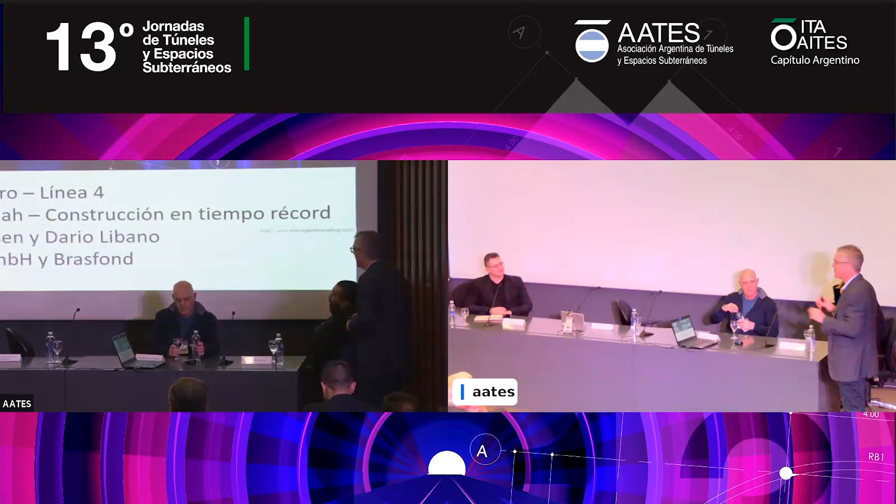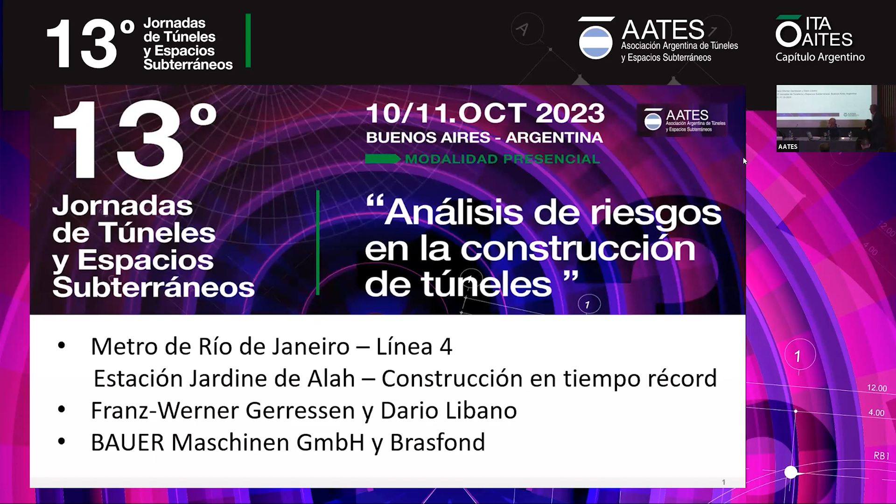Once more, welcome to a topic which is not 100% about tunneling, but you have a TBM and maybe you have to pass through what we show here, because it's now about the construction of a metro station. This has been done in a rapid tempo for the Olympics: the Metro de Rio de Janeiro, Line 4, about the station Jardim de Alah.

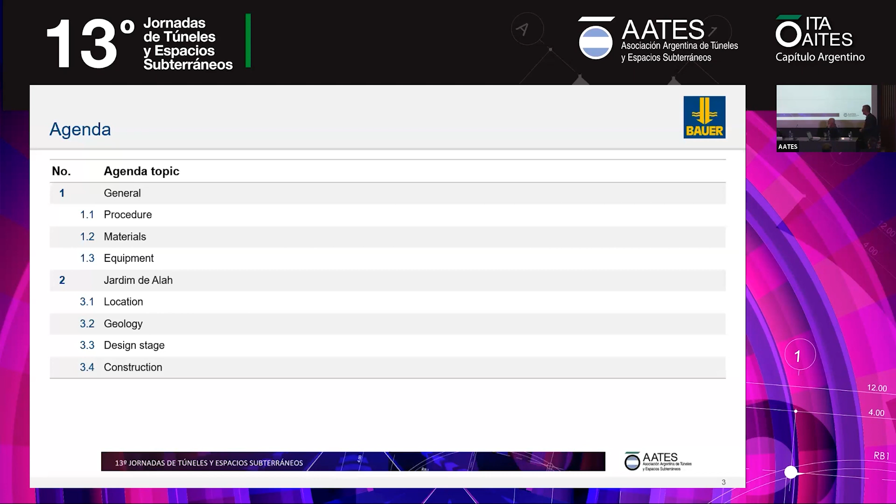For those which are not familiar with the main technique, I will give you a brief introduction to the procedure, and then of course we will move to the installation and the job site. So a little bit in general about the procedure: we are talking about diaphragm wall installation using a trench cutter system.

When we look at the system, how does it work? First of all, we need to do a small pre-excavation inside a guide wall before we can launch the trench cutter to install and excavate the trenches. Usually the excavation takes place in a single or multiple bite as shown here.

As soon as we have finished the excavation, we insert the reinforcement cage and start the concreting process. Usually you do a number of primary panels as shown here, and then come back later and install secondary panels. The secondary panels cut into the primary panels, and due to the shape of the cutter wheels, you get an interlocking system which ensures good contact and a watertight joint. So with all the secondaries, you close the gaps between the primaries and create the continuous wall.

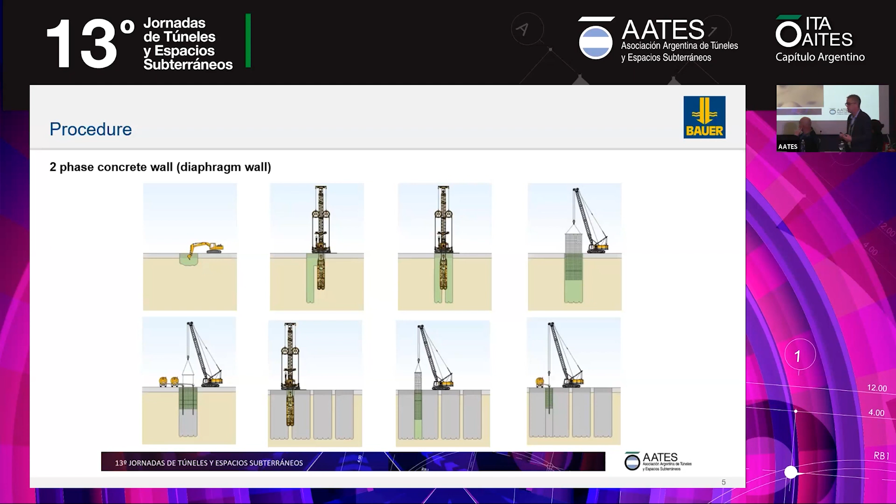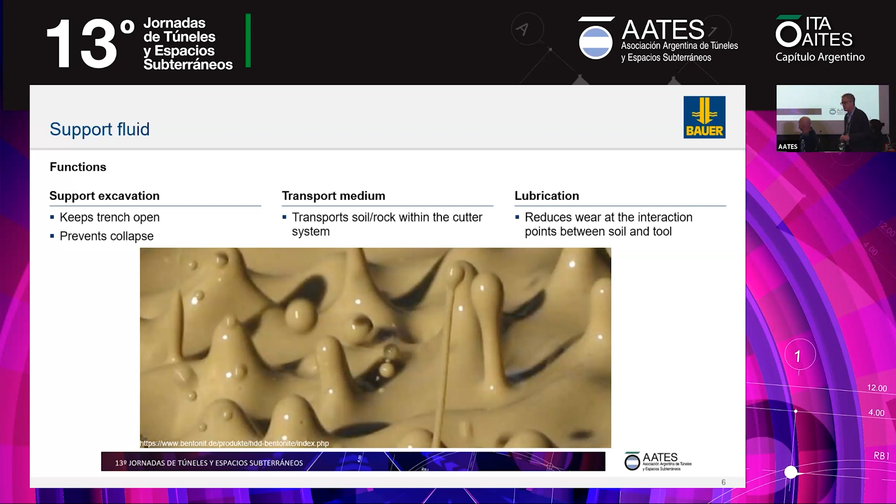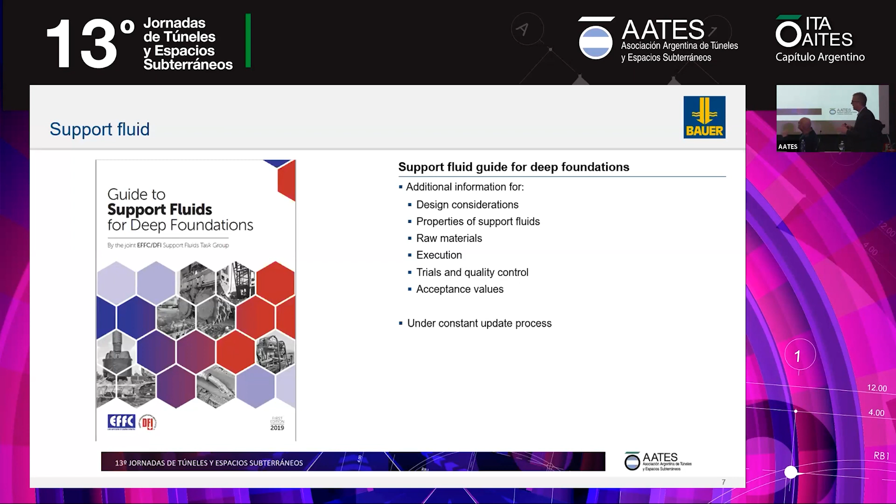Typically, bentonite or polymer slurries are used, and I want to mention there is a guide for support fluids for deep foundations, a joint effort between the American Deep Foundation Institute and the European Federation of Foundation Contractors. They put all the knowledge and disciplines of their working group together to make the industry better. It's freely available on the DFI or EFFC webpage, and it can guide you through all the information you require for the design, properties, execution, quality control, and whatever is required for using a support fluid.

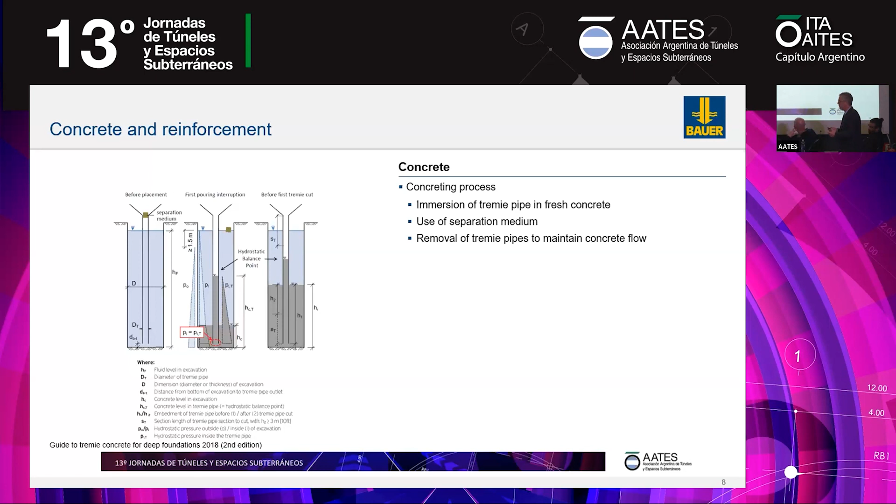In the second part, after we finish the execution, we have to reinforce and concrete. For the concrete, it's important to have a proper tremie pipe to ensure a proper concreting process, and of course concreting is quite an important issue. Especially when you go for deeper concreting sessions, the concrete properties for workability, stability, and self-compacting are quite important to avoid any problems.

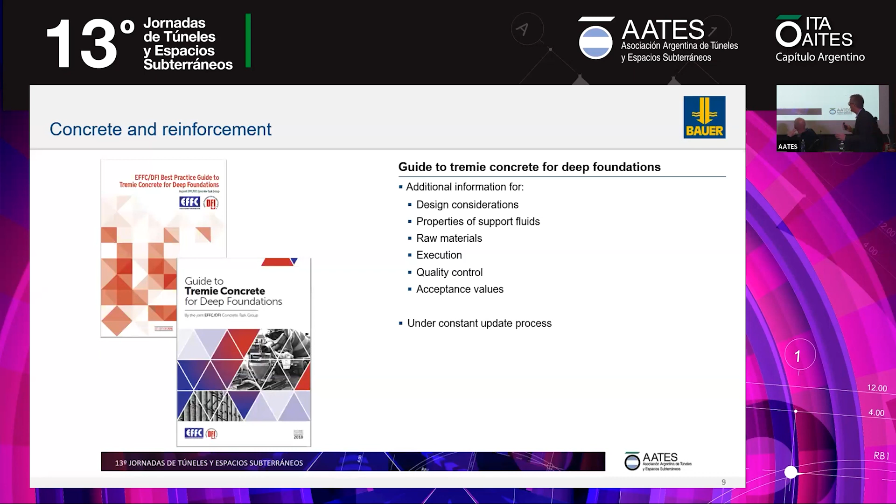There is also a guide available for this. They are already in the second edition, so they have gained more experience. Again, I recommend whoever is interested in these topics to download it from the homepage, and it's set for free.

To execute the work, we need some equipment, and here we see various types of so-called hose handling systems, either on a crane-based system or on a mast-based system. Depending on the slurry hose system, you can achieve higher depths. The biggest depths you can gain with a hose drum system, which you can mount either on a base carrier as a drilling rig or on a crane.

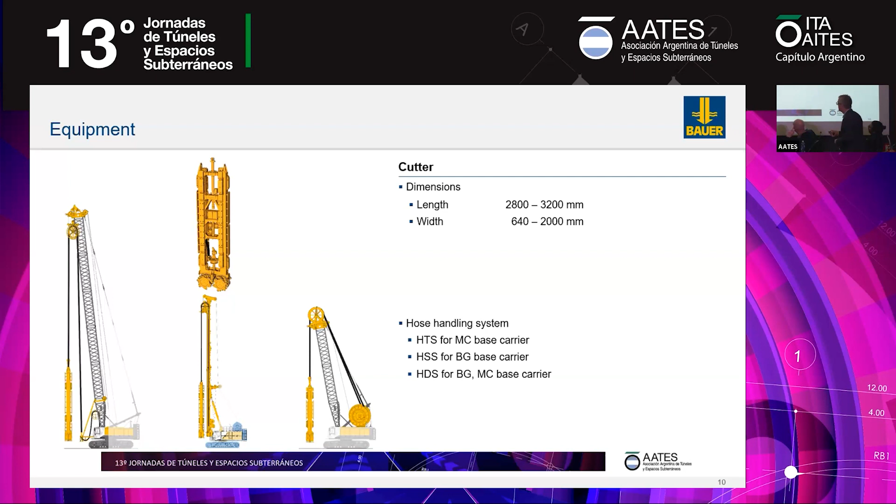With a hose drum system, we are actually able to reach depths of up to 250 meters. Of course, the key component is the cutter itself. When we look at the cutter a little more, we have some steering plates to guide the cutter in case any deviations occur. We have a mud hose inside, and as said, we cut the soil with the cutter wheels.

They are hidden here for special reasons, at the bottom. When we loosen the material with the cutter wheels, there is a suction box on top. The suction box acts like a Hoover cleaner and removes the loosened soil together with the slurry via the mud pump and the mud hose.

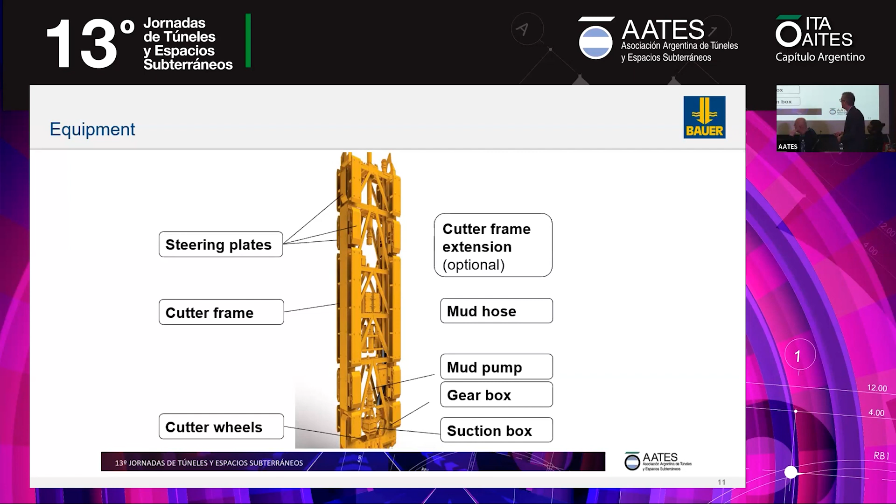Of course, we need to know how the cutter wheels look like, and there are various types of cutter wheels existing. We have standard wheels for any kind of soil conditions, and we have various types of wheels for rock and very hard rock conditions. So whatever you expect in your ground conditions, you can adjust your wheel types.

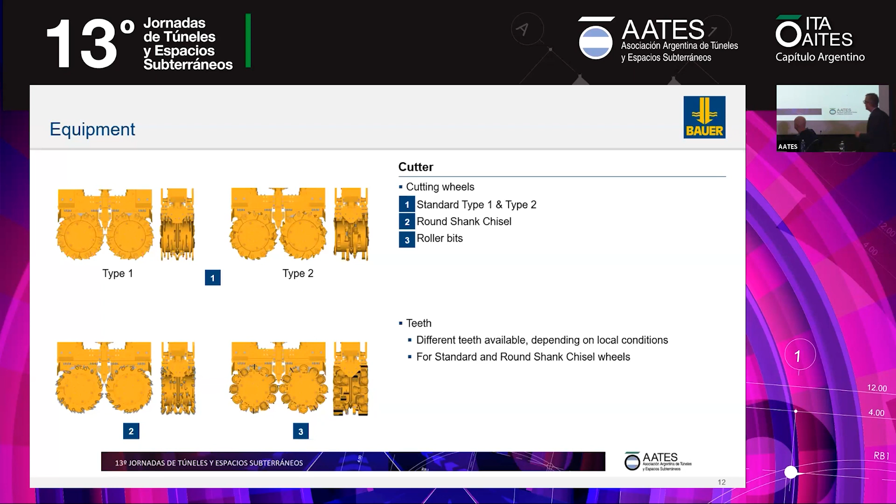Unfortunately, we cannot change the wheels like Formula One. It takes a little bit longer, but it's reasonable time. Altogether, it is somehow in a circle.

As said, when we loosen the material with the cutter, we transport the material on the downstroke through the slurry pipe, through the hose, and we pump it to a desanding unit. At that area, the slurry and the material, the soil, will be separated so that you can spoil the material, the soil, and the slurry will go back into the circuit and will be pumped back into the trench, because you won't have an empty trench. You have to have it filled and stable. And so this is a closed circuit.

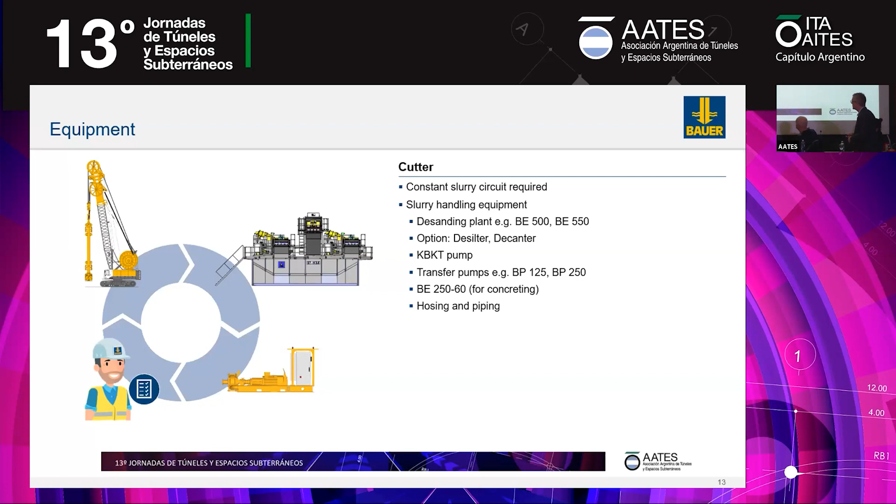And the desanding unit, you can adjust according to your soil conditions. You can add a desilter, you can add a decanter. So whatever is required to have a proper slurry for the installation, you can set it up. So now we know how to do the work.

We can take a look at the subway station.

Line number 4 was at that time the newest addition to the network in Rio de Janeiro. It starts in the south at the nice areas of Ipanema and the beaches, going west to Barra da Tijuca, where the Olympic Park and the Olympic Village was built for the Olympic Games. So everything had to be done until the Olympics 2016.

It covers in total six new stations. This one was already existing. And the whole thing is about 16 kilometers in total length. The expected cost was about $2.2 billion US. You may ask later what was the real cost. Unfortunately, I cannot answer this question if you think about it.

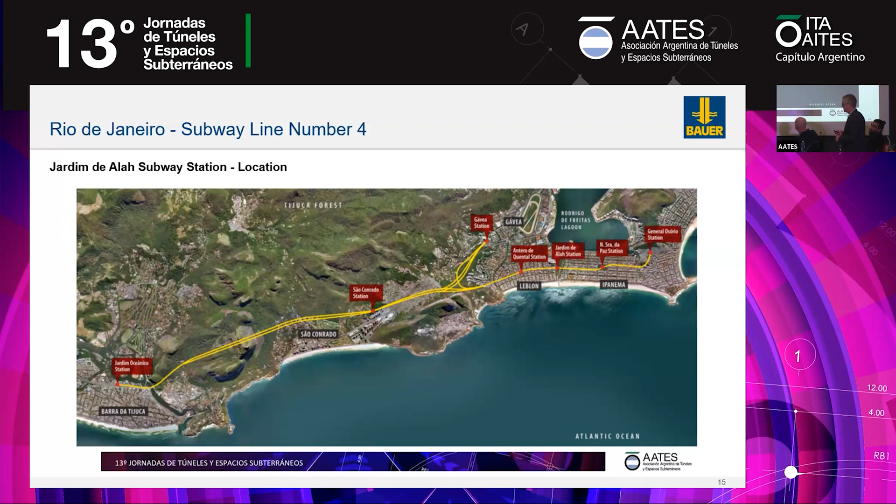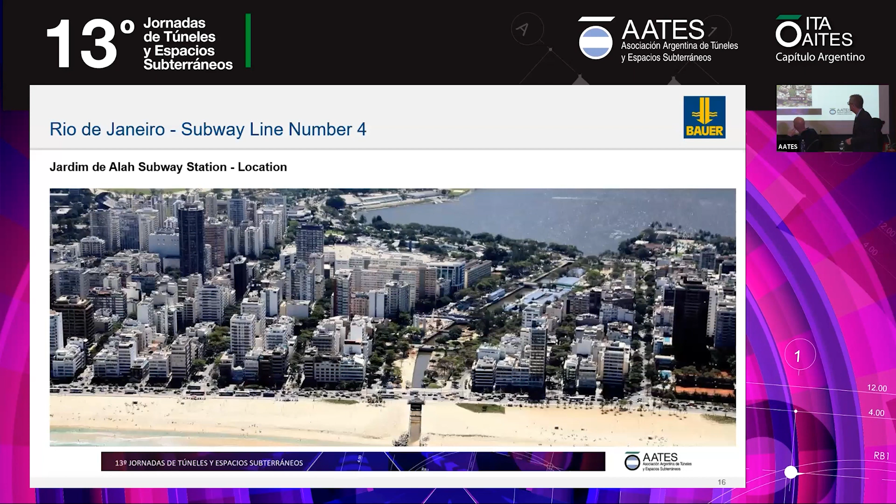We focus on the most critical and most complicated station, the Jardim de Alah. It's located in an area between the ocean at Ipanema and the lake. You can already imagine here, you can see already some silos. And we look a little bit closer, it's really in the center of a street, adjacent to high-rise buildings.

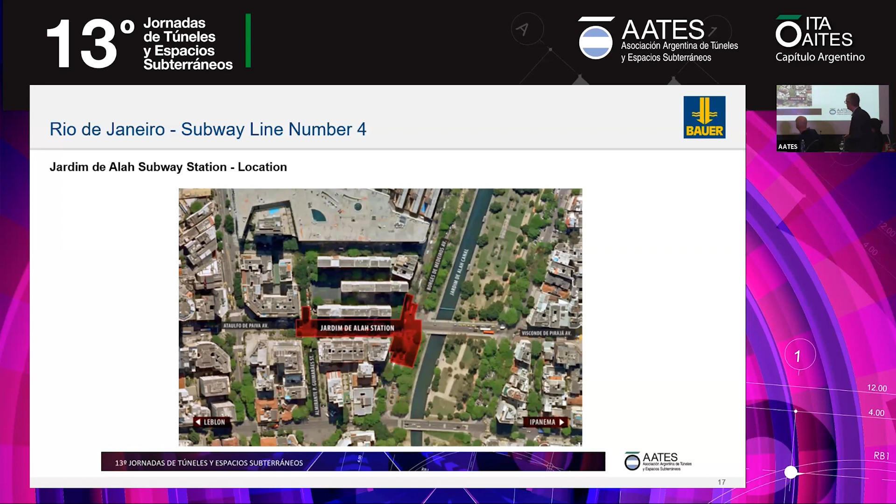The high-rise buildings are just founded on shallow foundations in a saturated sand, and the groundwater table, you can imagine, is quite high, so it's just 3 meters below the ground because it's sea level. The soil conditions are mainly sand, loose to medium sand, also sometimes compacted, and then we reached rock, a gneiss rock with a strength of about 150 megapascal.

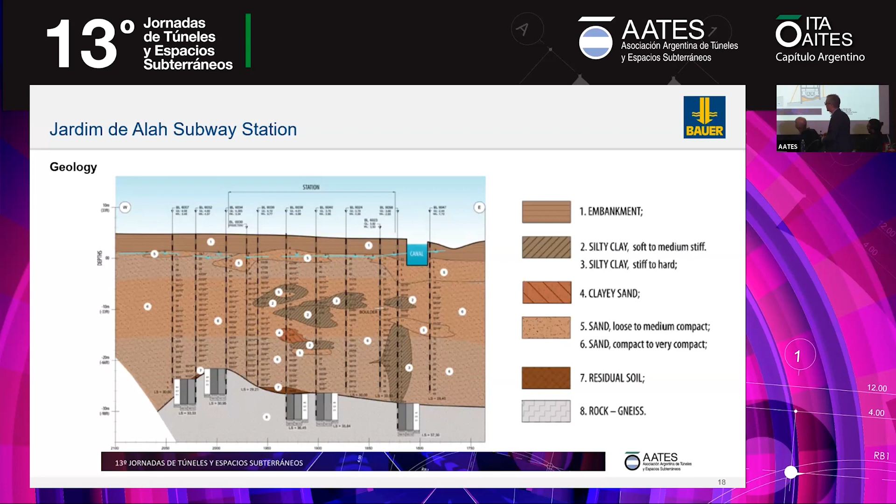So the original design was to install the station with a dimension of 120 by 18 meters in a, let's say, traditional top-down cut and cover method, here shown with all the various steps.

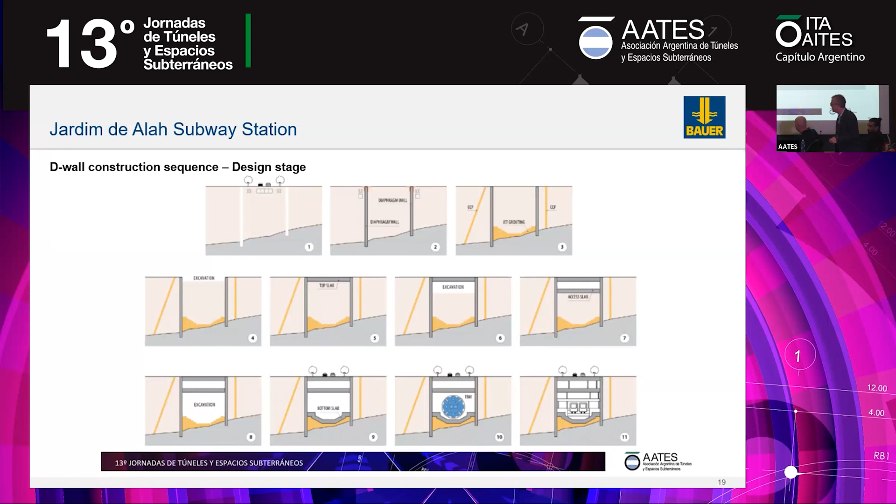Looking a little bit closer to the design, in the design stage, they considered to do the diaphragm wall just to key or to hit the rock, and then pin all these elements into the rock with some root piles.

To ensure the water tightness, they wanted to do, behind every joint and at the contact zone, a lot of jet grouting columns for sealing purpose, and also a jet grouting plug underneath to ensure water tightness of the excavation pit.

Excavation needed to be done down to about 24 meters. So it's a quite critical situation.

So now there was one big concern and one big problem. The big concern was whether they can guarantee dewatering. You can imagine you are close to the canal, close to the ocean, so there's a lot of water to pump if the ocean is coming through. Second, there was a time issue. The TBM was, let's say, almost on the way, and they were thinking about how we can accelerate the installation.

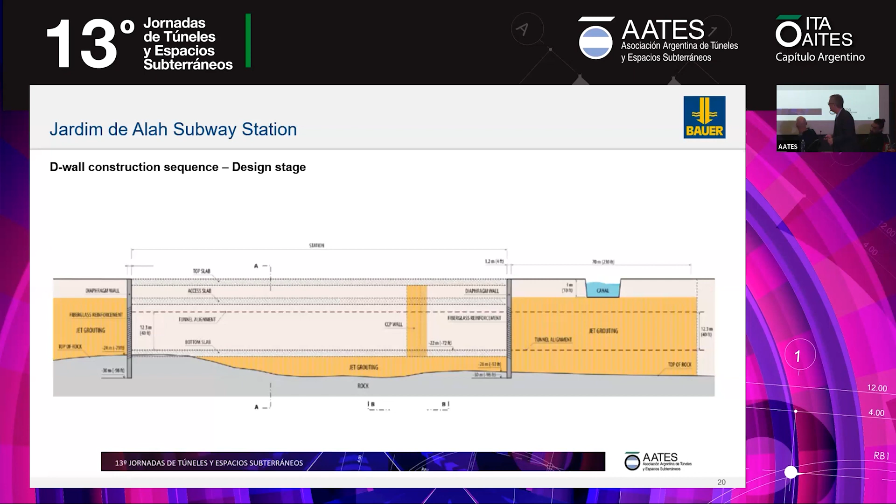So they changed the design in a way that, okay, this is a jet grouting plug. In addition, there were also jet grouting walls planned for the access and the exit for the TBM later on. But coming back to the redesign, they thought, okay, let's do directly a diaphragm wall using a trench cutter and key into the rock for 2 to 6 meters without having these root piles.

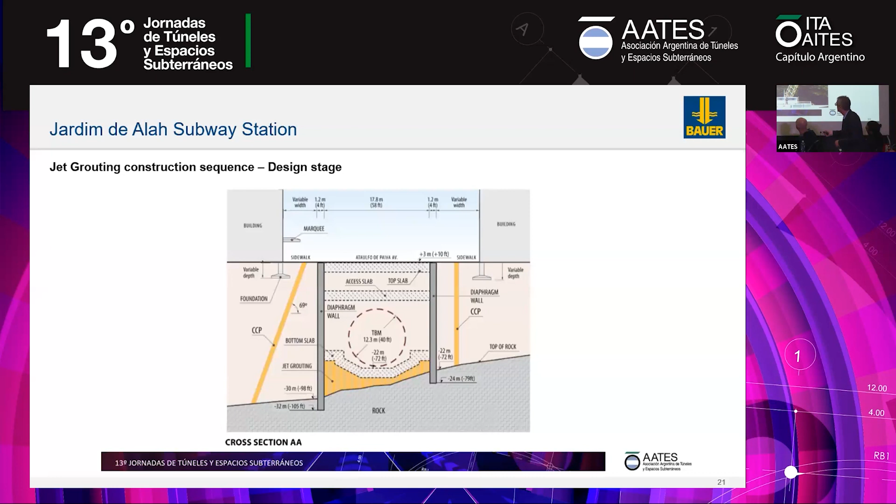So therefore, they could eliminate also all the jet grouting plugs, but they did a little bit of jet grouting. Here you can see, let's say, the situation quite narrow, everything.

Here now the final design, the final way they executed it. First, as the rock varied in depth from 20 to 33 meters and was very uneven, they decided to level the surface of the rock with a small jet grouting addition, just to ensure proper installation and that the penetration of the cutter could be easier done and guided to avoid any deviation.

To be on the safe side, since the buildings were quite close, they decided to go only with single bite panels, even for the primaries, to ensure there wouldn't be a problem with trench collapses and settlements in the surrounding area.

After the jet grouting, they started with a small pre-excavation, then did the cutting process, the reinforcing, the concreting, and came back after a while to do the secondaries to close the wall.

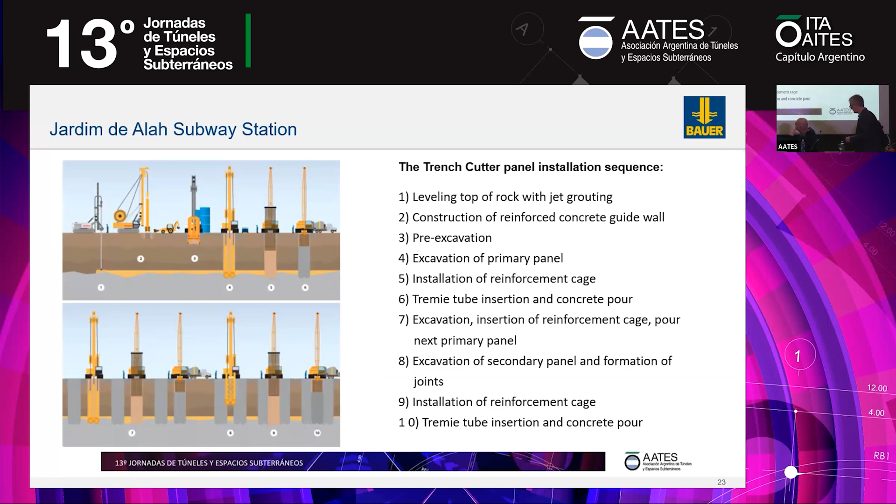It was very important to do all the quality control. For instance, the operator of the cutter has real-time control with inclinometers, accelerometers, and gyro compass to really ensure a straight installation. There are flaps in case the cutter tends to deviate, so the operator can react and ensure straight installation. Here you can also see a grab, which was used mainly for the pre-excavation.

In this specific picture, for the access areas of the TBM, the reinforcement used fiberglass for the entry and exit, so there was no jet grouting there.

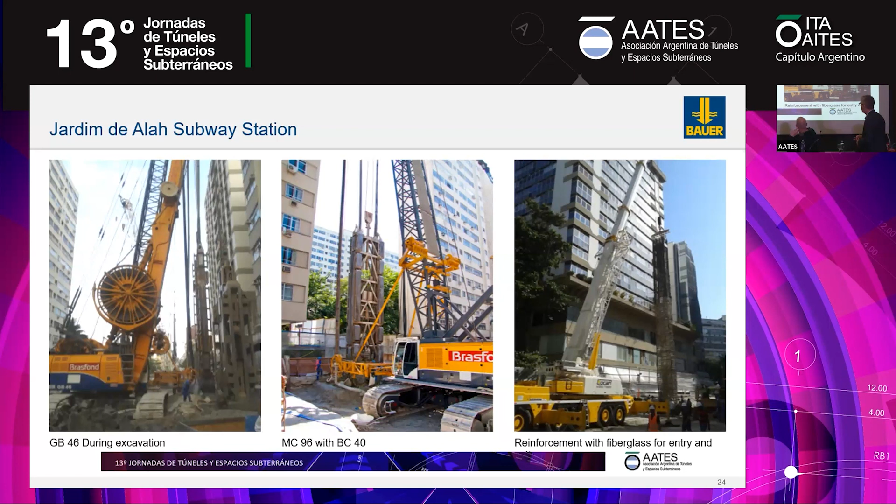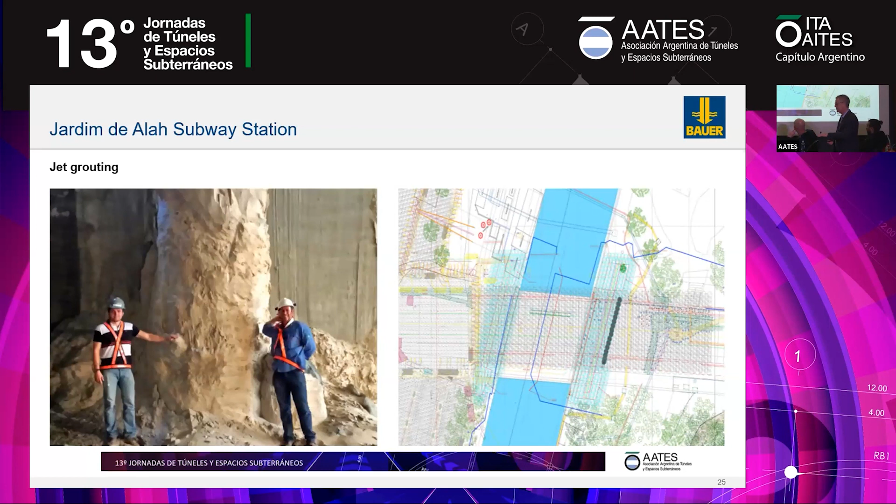But there was still some jet grouting to do, not for sealing purposes, but because they had to pass the canal. The jet grouting mass installation had to be done to ensure that when the TBM went through, there was contact between the cutter, the tunnel lining, and the jet grouting. It started in the canal just below its surface, down to the rock.

Of course, you couldn't close the canal. So in this case, they built a working platform inside the canal, covering a little more than half, and installed the jet grouting there. You can see a couple of rigs working simultaneously. When they reached the halfway point, they removed one working platform, moved to the other side, and did the second half. To ensure there was really contact, the center columns were done twice, once from each side.

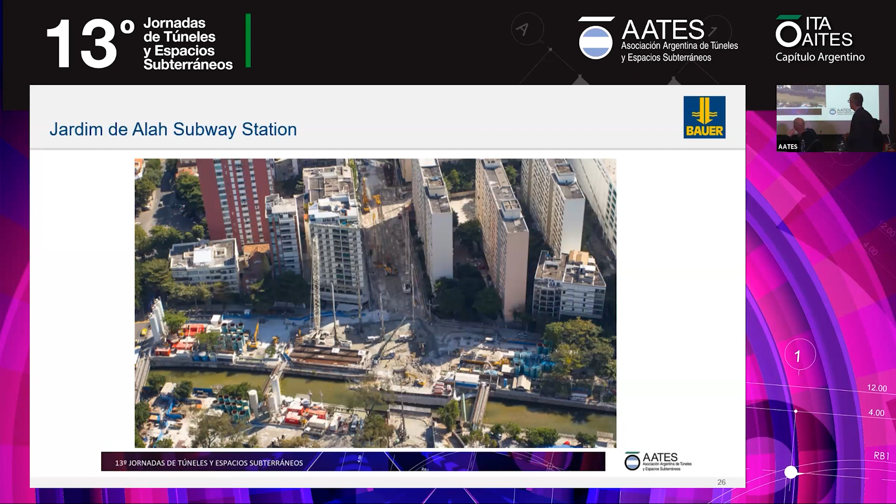In addition, just for safety reasons, they did a small jet grouting inside the station, as a kind of flood protection, with smaller diameters of only 0.6 meters. The other jet grouting columns were always 1.2 meters, but in principle this was just to get this wall done in case there was a risk of water leakage.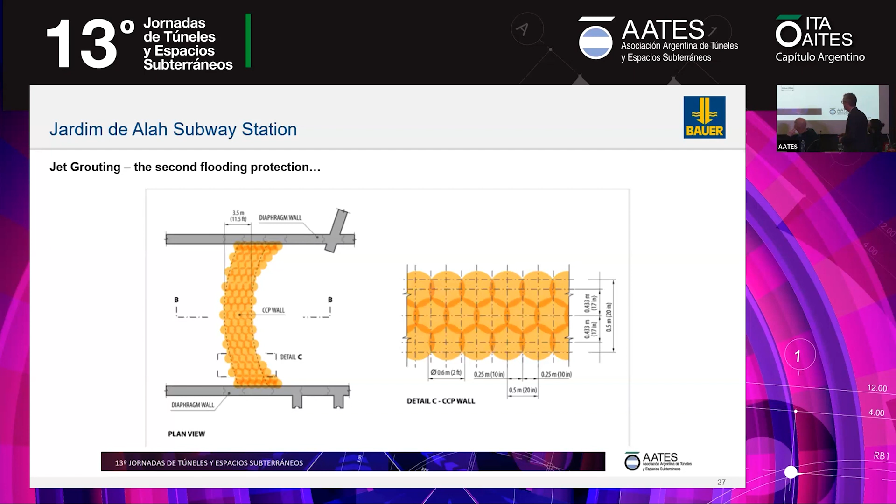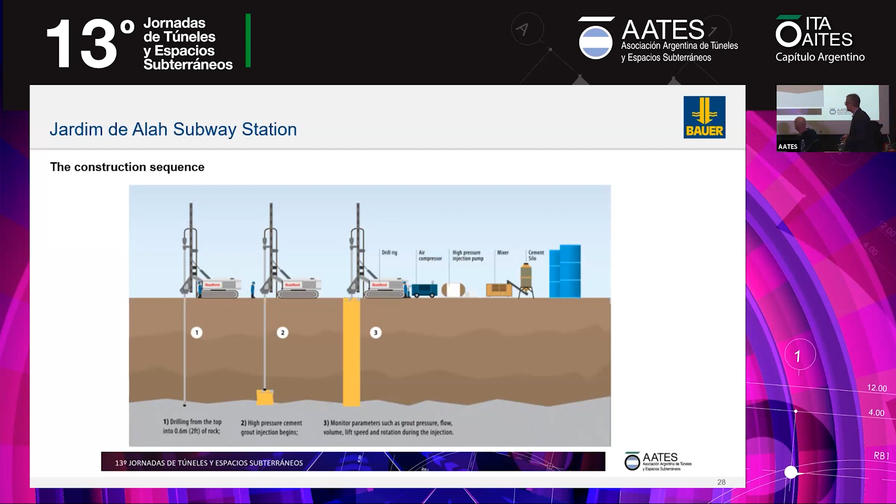The jet grouting construction sequence in general is easily done: working down, drilling from the top to the rock, a little bit into the rock, and then using high pressure cement grout injection by turning and lifting at a defined lifting procedure, at high pressure of about 400 plus bars. Everything is monitored during the installation process to guarantee a full plug.

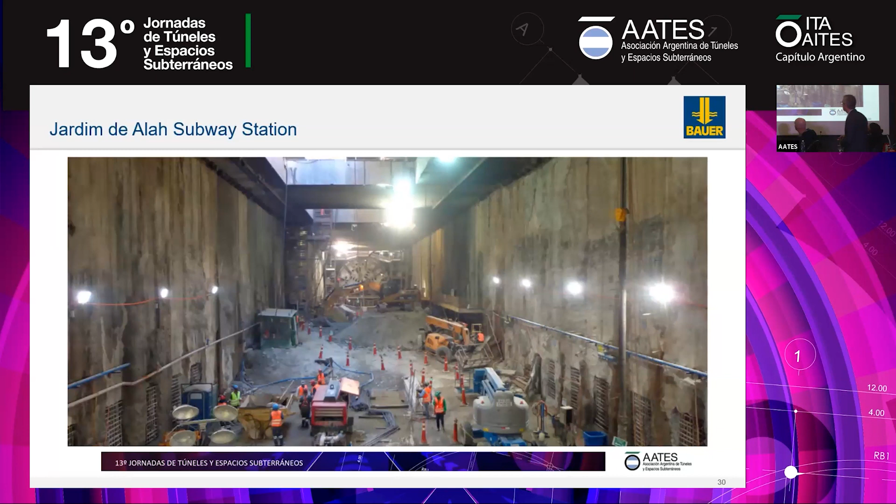Finally, a view of the front of the wall, and we still see a TBM, so we're back to the tunneling. The TBM arrives and passes, and everybody was happy that everything was just in time.

When you talk to the participants of this project, one big conclusion was that the successful interaction between all the specific parties - the owner, the authority, the contractors, the joint venture, the engineering parts, and the contractor - working together to find a solution made this a successful project.

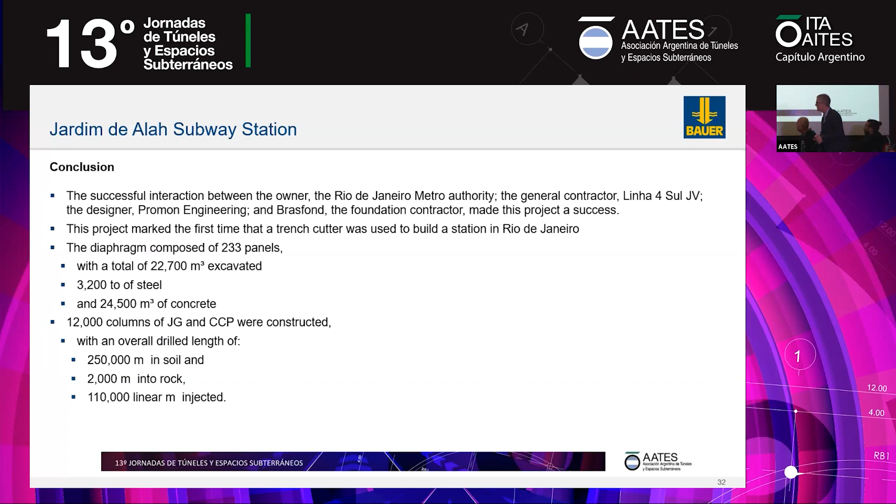At that time, it was the first time the trench cutter was used to build a station. It had been used for other purposes before, but here it was for a station in Rio de Janeiro. The total amount was about 233 panels, so 22,000 cubic meters of soil and rock were excavated. In addition, 12,000 columns of jet grouting were installed, so about 110,000 linear meters were injected.